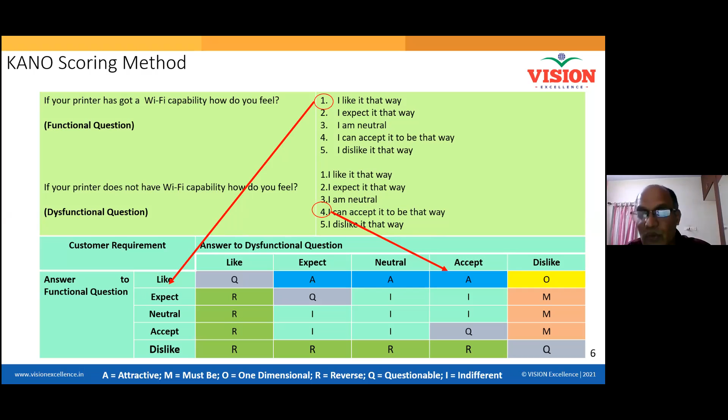We have already given two examples, so I hope you have understood this. This is how the Kano model generally works. You ask two questions, and from the answers to both questions, you conclude where you are standing and which feature you are looking into. Now this is another scoring method.

When you are doing a survey, you will survey many people. You will not survey two people and decide. So when I survey for feature 1, three people said it is attractive and six people said it is a must-be feature. Opinion will vary from people to people, from age to age. The young generation will say something and the old generation something else, so you have to survey across all generations and ask these questions.

Some people said it is one-dimensional. So when we have multiple opinions like this for one feature, which one do you choose? You have to choose the mode. You know mean, median, mode. Mode means the highest number, median is the middle number, mean is the average of the total. In this particular case, you have to go for the mode.

Let us take feature number 5. One person said attractive, nine said must-be, and six said one-dimensional. Some said it is a reverse requirement. Questionable means they have not understood the question at all, and you also see indifferent. So it is a must-be feature, because the highest is nine in this case, so you go for must-be feature.

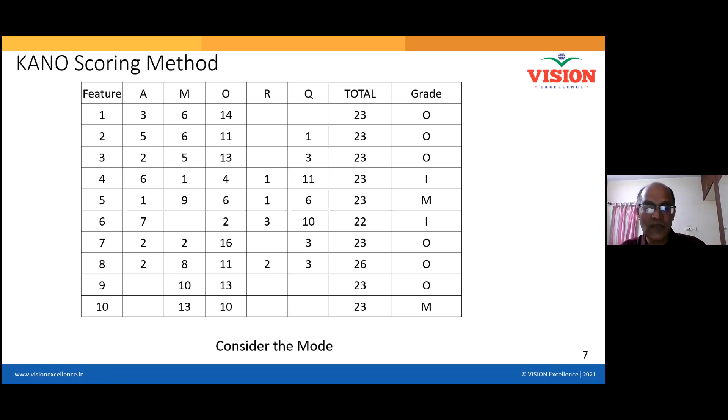All understood? Yes, sir. Understood? All enjoyed or felt sleepy? After food, sir, enjoyed it, sir. Okay, thank you very much. Because after lunch sometimes people feel heavy. Oh, two of the participants asked you questions, so they were not sleepy. They are very attentive. People who have never opened their mouth so far, they have opened. Thank you very much, participants. I have one question. Please ask.

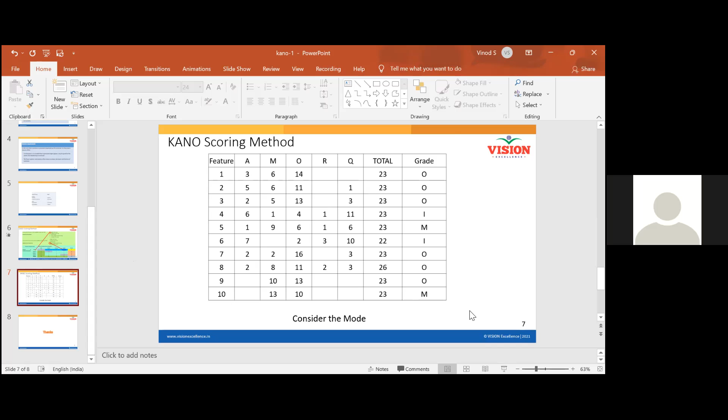In the column grade, there is another denomination as I and Q. I is indifferent. Indifferent means it doesn't know whether it is acceptable or not acceptable. But on what basis is that questionable grade defined? It is questionable when they are asked and they are not able to answer properly. So here the mode is that questionable.

As I said, when I ask if I add it, and when I ask if I don't add, what will happen, he is giving both the same answer. That means he is not understanding what this particular feature is all about. So if the mode gives this, they have not understood this particular feature. So just leave it as it is; that particular feature we will not add at all. If the two answers are not consistent, it is indifferent. Yes, sir. Both the answers are not consistent, then it is indifferent.

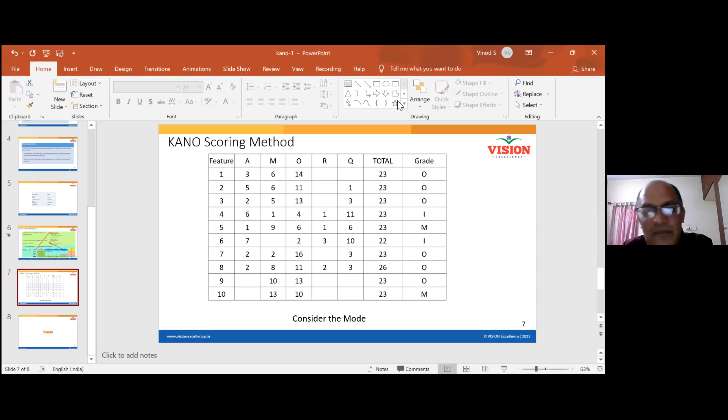More questions coming means people are understanding more. I'm happy. The more questions, the more we will be happy. Okay, shall I move to the next topic? Yes, sir. With all your permission. You can move. I'm going to another topic, let me just open that. One second. Jai Kishore, you wanted to ask a question? No, it's okay, sir. Okay, thank you. Where is that? One second.

Another one we are going to see is called quality function deployment. So we are moving towards another topic, which is called quality function deployment. All of you ready for the second attack after the Kano model? This is another interesting topic, like the Kano model, to understand the customer's requirement. All this Six Sigma, ultimately why are we doing it? We want better customer satisfaction. It is for the society and for the customers. Anything you learn and study is useful for better customer satisfaction or better living of the society. So that is why we take quality function deployment.

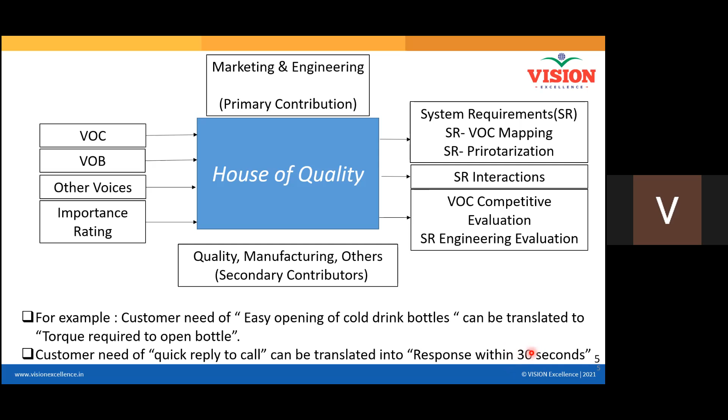Another example: customer needs a quick reply to a call. So the customer is telling that I need a quick reply to a call. How will you convert it to a technical requirement? You have to say response within 30 seconds. So it's measurable, right? When the customer is saying quick reply to call, you are converting it to a technical requirement by saying response within 30 seconds. So this is called converting voice of customer to a technical requirement.

Now we will see with one example how quality function deployment works. This is a simple one to understand. This is called quality function deployment. Here it is structured in different ways, so we will see each one by one, and if you have got a question, you can ask during that time. First, we have to capture the customer's requirement. This is the quality function deployment for a printer. Now, the first requirement is the customer requirement.

If you want to go for a printer, the printer can be for house purpose, for office purpose, or for a design office. So the printer's customer requirement will vary from customer to customer. If you want it for house purpose, we are not worried about the speed, quality of printing or other multifunctions. For a house you have to worry about the size, because your house will have very limited space. You will worry about the size and the space.

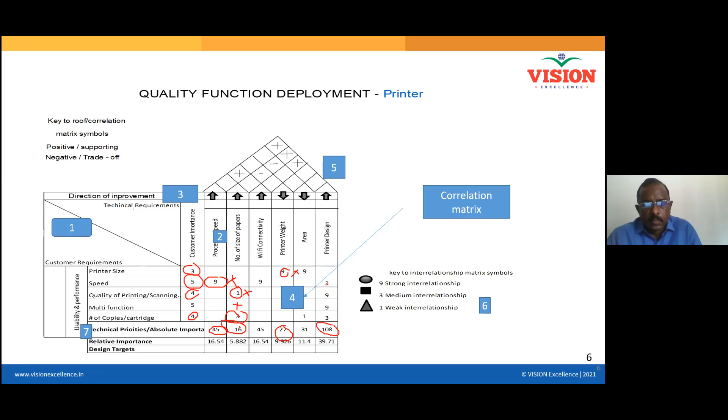Like that, here it is 31, and here you can see it is the highest number, because 3 into 5 plus 9 into 4 plus 9 into 5 plus 3 into 4. So you are getting totally 108, right? This much is clear? Yes, sir. Now you have to add all these things.

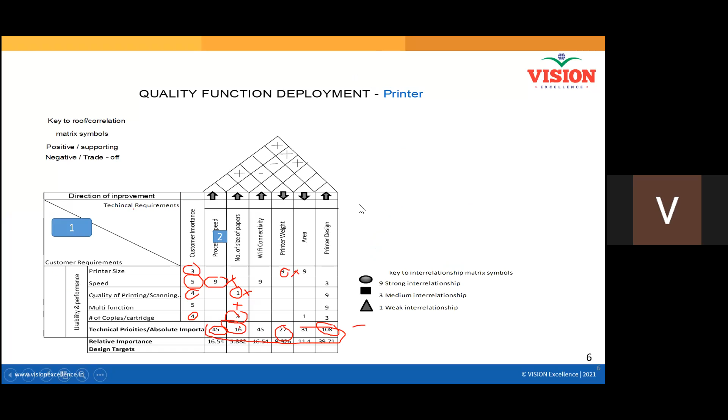So you are getting, sorry, one second. One second. Okay. Now, no, it is not coming.

Anyway, you have to add all these things. I think you are getting 272. Now, when you are getting 272, you have to divide 45 by 272. So how much are you getting? You are getting 16.54. You are actually calculating your relative importance. Now you have calculated the technical priorities: 45, 16, 45, 27, 31, 108.

So how did you get it? You multiplied and added. Now you added all these things and you are getting 272. Now from this 272, what is your weightage? For 45, what is the weightage? For 16? You have to take it all as percentages. Like 108 means it is 39.7%.

How? 108 divided by 272, so you got 39%. 31 divided by 272, you got 11.4%. 27 divided by 272, you got 9.92%. So you got a relative importance from these numbers. Now, by doing that, what are you going to get from this?

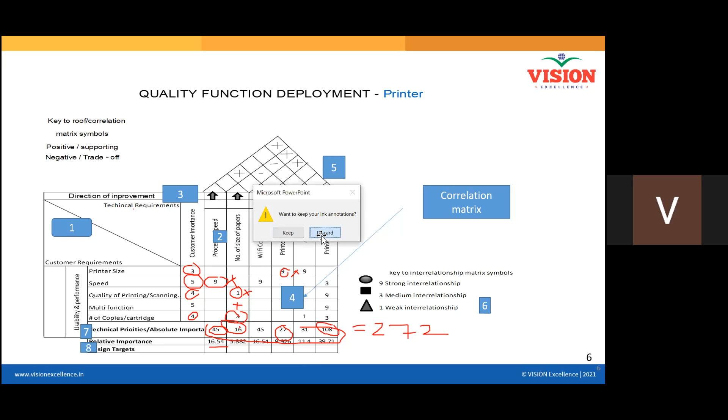So accordingly, you can change. It is not going. Discard. I'm just discarding it. I'm just removing that, so it is visible clearly. Okay. Now you got from here 39.71 is the highest priority. Okay, and next is 16.54. There are two priorities of 16.54. Okay, so you got all the priorities from here.

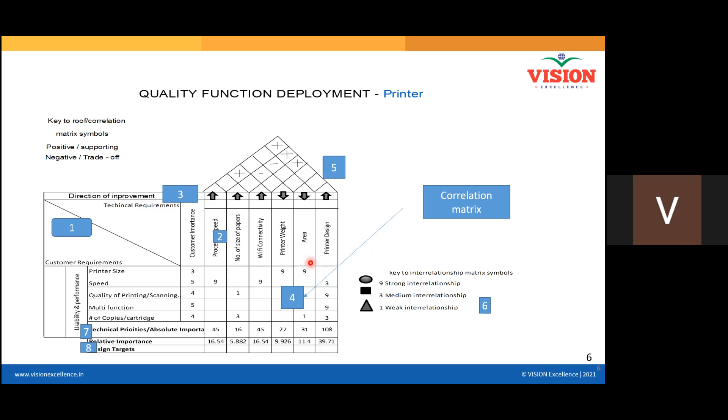I'll just show you its Excel sheet also, with this calculation. I'll share that Excel sheet so that if you have got some doubt, you can also get from that. 1 second. This Excel sheet I'll share with all of you. Okay. Okay, sir.

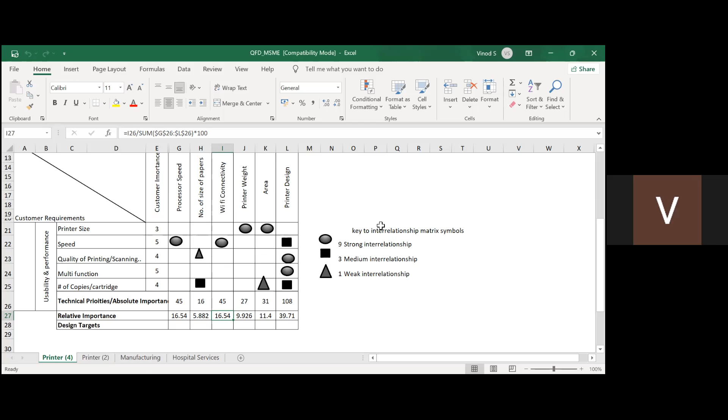Yeah, you understood? Any question? Nothing, sir. Now this one I am giving you as a homework. This particular worksheet I will give as a homework to all. One second, start video. Okay. Now this is another one. This one you can take as a homework. I will send this sheet to all of you.

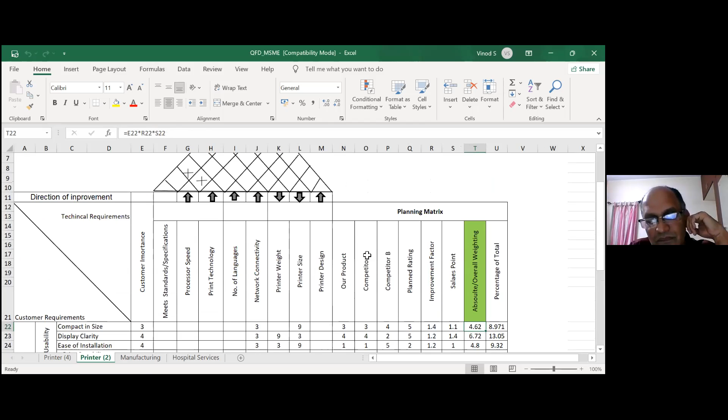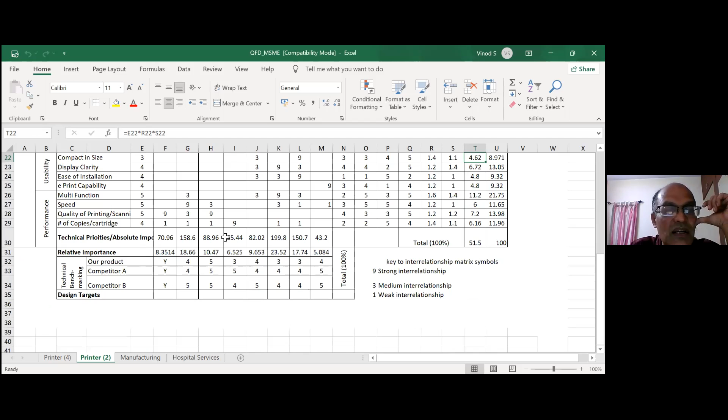Now we have discussed all this area, right? Customer requirement, technical requirement, then the QFD, the importance, then the technical absolute importance, then relative importance from that. Now, if you have got some competition, take this one as a homework. If you have any doubt, you can come back to me next week. Here, if you want to consider this competition also, apart from customer importance, you want to consider where your competitor is standing and what improvement you require.

If you want to consider those things, there is another column over here called planning matrix. So you can consider competitors' point of view in terms of your customer requirement, and from there take all these dimensions. Instead of here, in this case you start taking the points from here because you are considering the competitors' point of view also. From there, you consider your technical importance as well as relative importance, and where your product stands in terms of those technical requirements. Considering all that, you go to a design target.

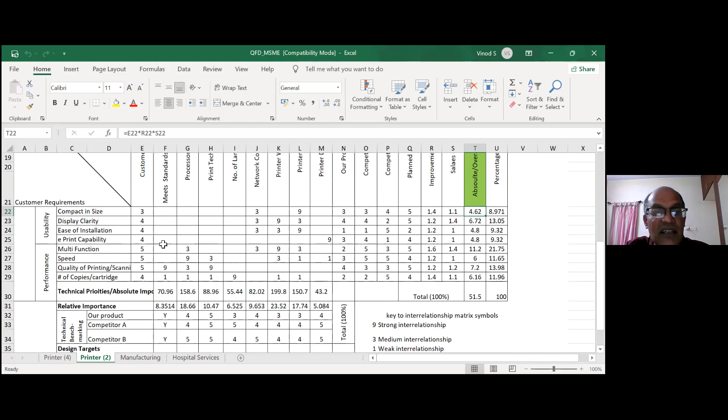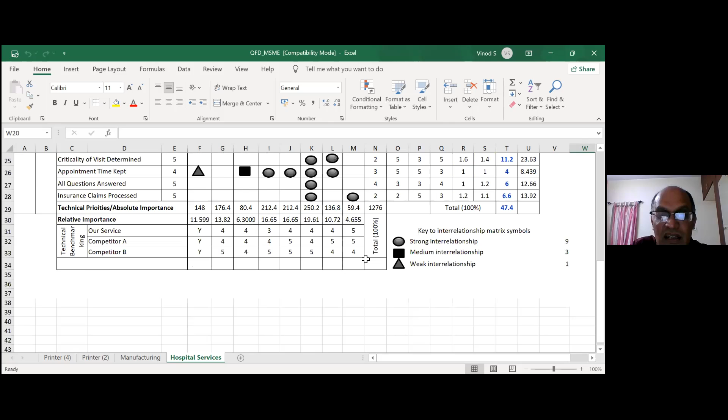So this is the same quality function deployment, but you have added only the competitor's point of view. All the calculation is given over here. My request to all of you is just go through this. I'll send this sheet. There is a manufacturing example given here, and there is a hospital service also given here. The principles remain the same. Only instead of the calculation from here, the calculations are coming from here considering your competition. That is the only addition; the remaining all remain same.

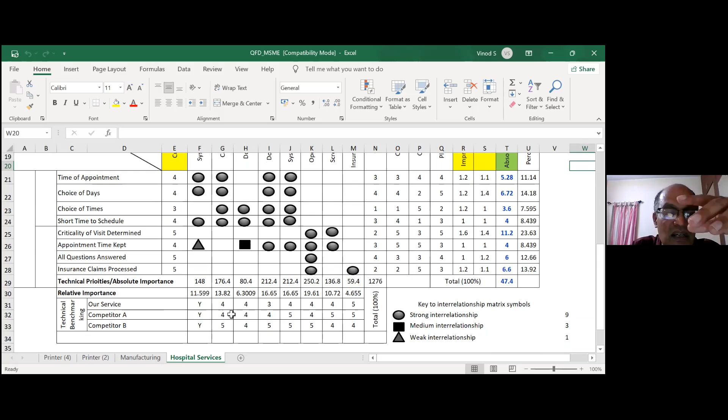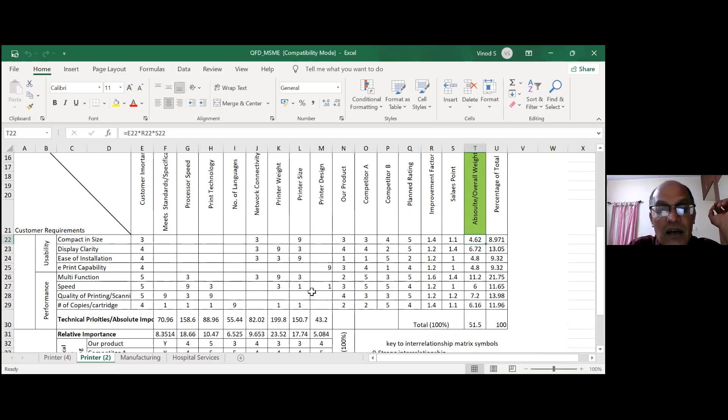Okay, so I'll share this sheet to RK sir. You can collect from him and go through how it is made, and if you have got any doubt you can ask. Also, if you have got any product and you want to do a real exercise, you can do that, so that with hands-on exercise you will have so many questions and more clarity on these kinds of topics.

Okay, so this is what is QFD. If you have got any doubt in QFD, you can ask. Otherwise, we can move to the next topic. All of you are clear? Yes, sir. Okay.

So, what is next? RK sir is there? Sir, I'm there. QFD also completed. Now next is case study. Probably you can take some rest. I will finish off SIPOC and then you can go to case study. Okay, fine. That will be fine, right? So we have got time up to 3:45, because I'll finish it and then ask them.